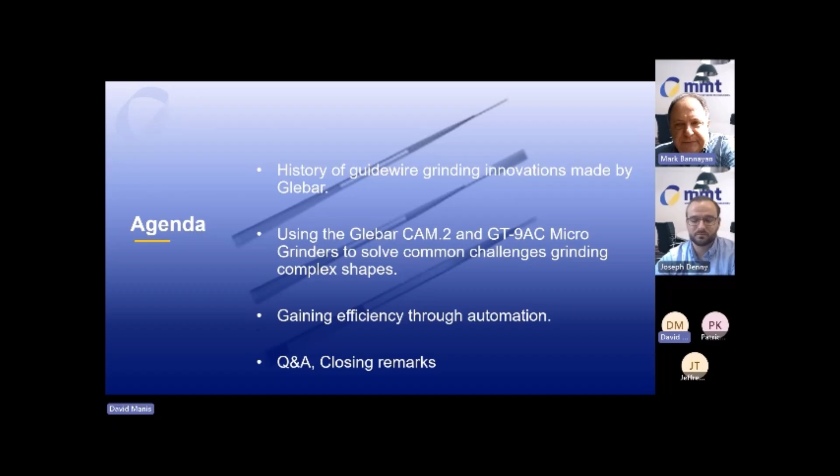Our involvement in the guidewire industry started back in the 60s. Traditionally, guidewires were made using a chemical etching process, which is pretty toxic, very time consuming, and also doesn't have the accuracy that's needed. Over the decades, requirements from the guidewire industry pushed for better accuracy, better throughput, and easier setup. So in 1966, we started grinding single taper guidewires.

As guidewires got more advanced, requiring multiple tapers, the technology at the time was not available to do multiple taper guidewires. So we developed a patented system using sensors, back in '94, which gave us the ability to grind multiple tapers in one process. That was a revolutionary idea.

Since then, we also developed a different way of handling guidewires. Traditionally they were done in centerless, which is a fast process, but your length tolerances are much wider. So the requirement for tighter length tolerances made us rethink the way guidewire processing should go forward.

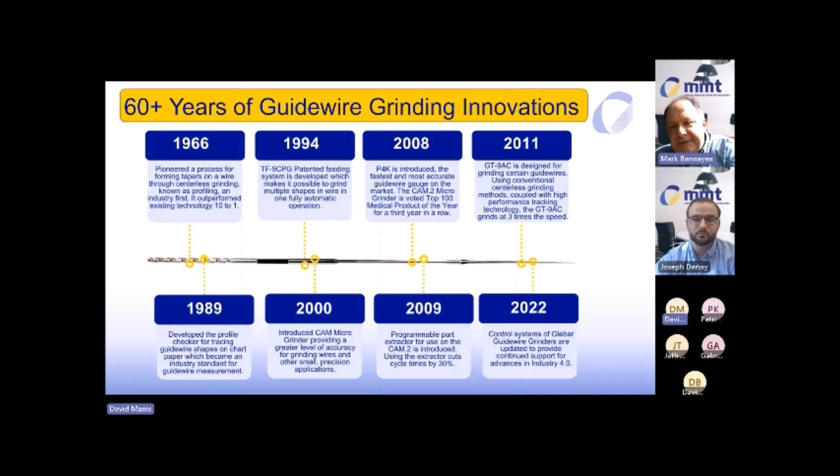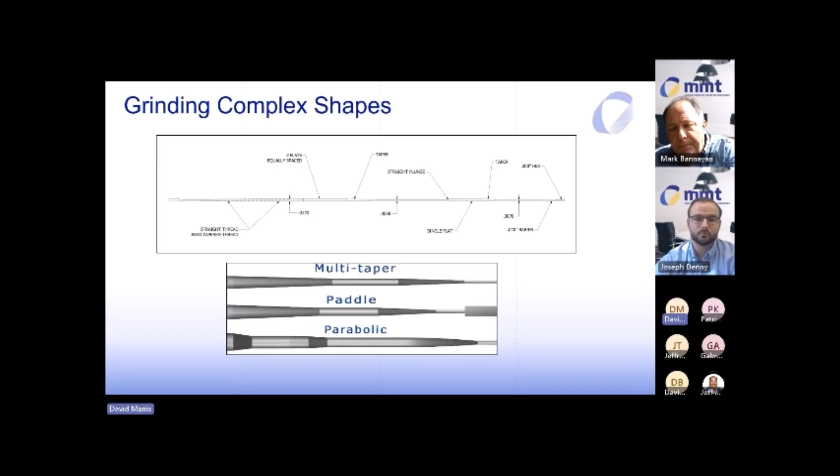The challenges that our customers face on a daily basis are on the material side. There are different materials coming into play with guidewires, whether you're dealing with SLT, different grades, nitinol, super elastic nitinol, different types of alloys. They all react differently through the grinding process.

So what Glebar does, we have hundreds of grades of wheels that we test with these different materials so we can achieve certain surface finishes. Also, tighter tolerances are becoming more and more required, and that's what we've built into the equipment to be able to meet those challenges.

The other thing we see is a skills gap in the field. Going back 15, 10 years ago, there was a lot of skill in the industry where people could basically set up a machine and make it grind wire down to 0.002 of an inch. That skill set is retiring, moving on. And we've recognized that challenge.

So we've replaced that with the control side. The controls aspect of our machines address the lack of skill in the marketplace. So we built the system so you could train somebody and get the machines up and running within a week, and one person could run 5-6 machines in tandem. Cycle times, of course, everybody's under pressure for faster cycle times, and that's what we work on here in R&D on a daily basis.

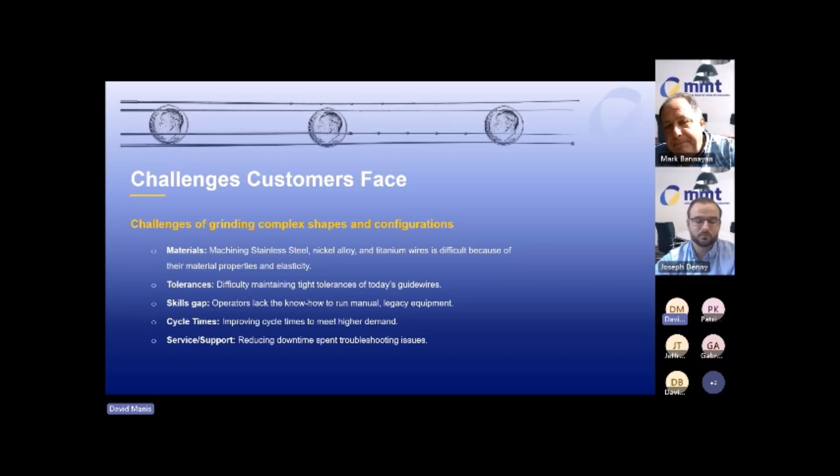So take it to Joe here, who's going to go over a couple of case studies that we've done on all the systems that we have.

So Mark mentioned a lot of challenges that obviously you're here, so you understand most of them. And I'm going to walk through them and help us understand how we're solving them.

So for everyone here, we're familiar with the stainless, the SLT, the nickel titanium alloys. They're kind of a pain. They're difficult materials to work with, and when we're presented them, we're starting out with material that's at around 30 thousandths of an inch and only getting smaller. So controlling the stock and actually maintaining position of that stock is a challenge.

We've approached that challenge in two different ways. On the CAM.2 system, we have our patented dual collet system, which allows us to grab and fully orient and align the parts throughout the grind. That, coupled with our additional captivation and tooling, allows us to have total control of length and orientation, allowing us to stop the wire, spin the wire, pull it back, push it forward, make the wire do whatever we needed to do during the grinding process. That, coupled with whatever wheel selection for the appropriate tooling, additional coolant delivery options, allow us to have full and finite control over that wire.

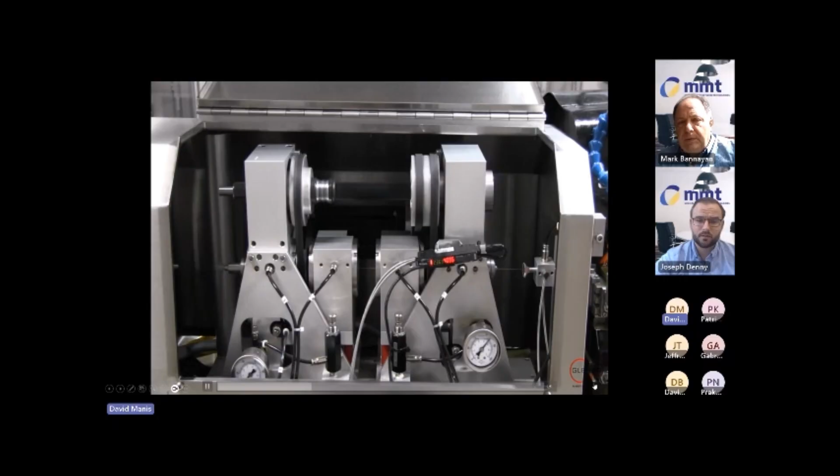So this is the dual collet system in motion. You can see everything is positioned in the grinding cell to prevent buckling and keep the wire fully in line.

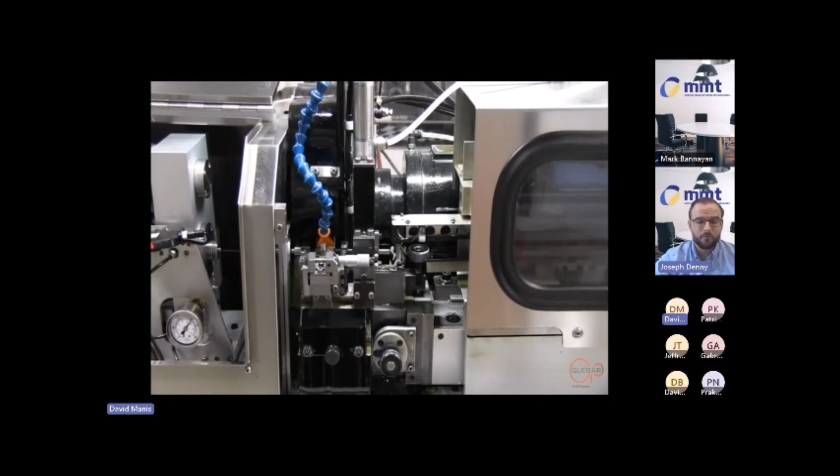David, can you take us to the AC? Once again, fully captivating the wire in the grinding system of the GT9AC, pulling it through with centerless grinding. We'll focus on the camera aspect a little later. David, if you could pull us forward.

So the envelope is always being pushed with tolerances. Both machines are built on a granite bed for stability. It's the same granite that you're going to use for all of your inspection equipment, so that helps us with both stability and vibration dampening in the system. All of our controls are centered around servo systems with 0.1 micron linear scales.

So on the CAM system, when we actually go in and do the grind, the front of the wire is located with a fiber optic sensor, and then the dual collet system grabs the wire and never lets go. It is a hand-over-hand feeding, so at no point during the cycle is the wire ever unmanaged. I know there are some other systems where you will have a hitching sequence where you could go for 12 or 18 inches and then you're going to have to hitch, and that first 18 inches will be good and the second 18 inches will be good, but you don't really know about one to the other. But with the true continuous holding of the dual collet system, there is no point of disruption. The 30 inches down the line will be just as accurate as the first 5.

And then on the GT9AC, we use the same fiber sensors to find the front of the wire, and then the camera system finds the tail end of the wire. And now we know the length of the wire.

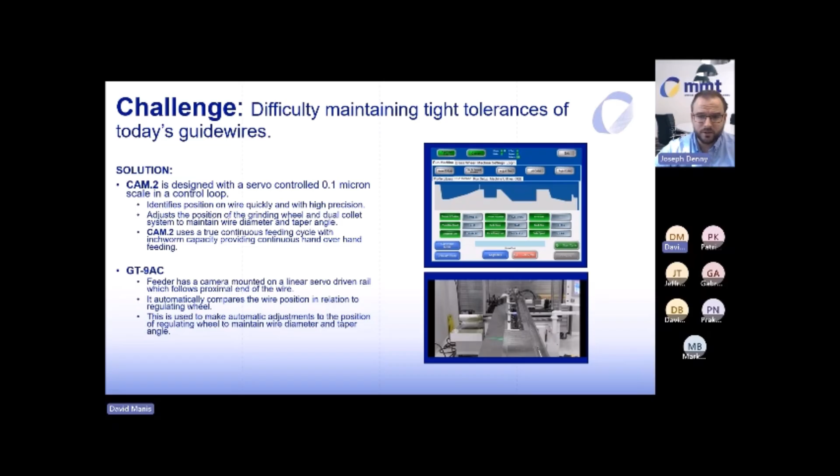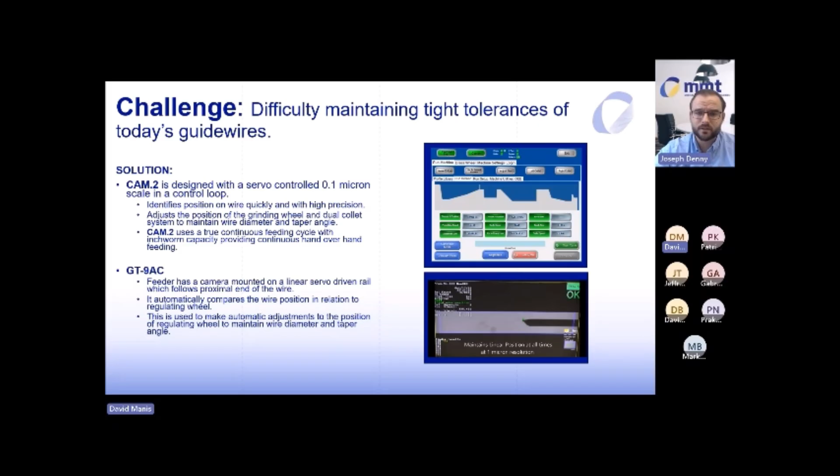This is the GT9AC feeder, and you should be able to see a little blue light - that's the camera system tracking the wire. The entire time you're grinding, the machine knows exactly where your wire is. On the CAM system, and this graphic applies to the 9AC as well, since the machine knows perfectly where it is, it displays that on the screen for the operator so they don't have to guess. They can just watch the machine run, and it's full real-time feedback for the operator.

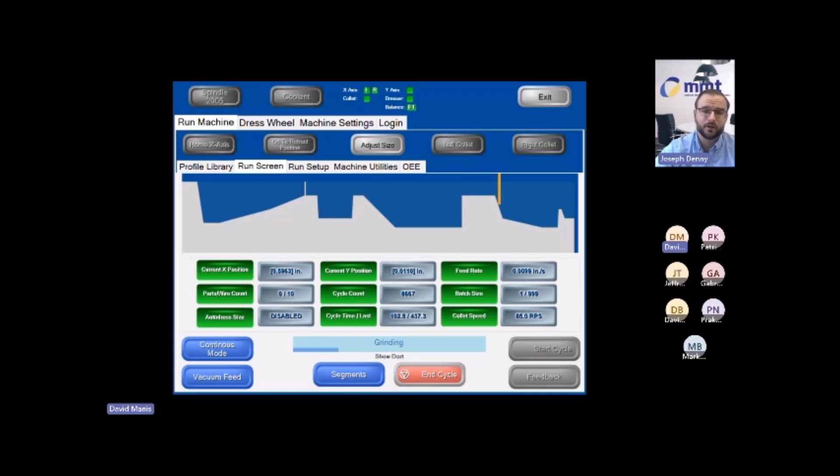Which leads us nicely into our skills gap with the operators. We all know the entire workforce is facing a skills gap, and we're always in a unique field of medical manufacturing. So what we've done is focused on taking the intelligence and putting it into the machine. Everything is touchscreen and conversational. The machine is running G-code, but the operator doesn't know that and doesn't need to know how to write G-code. All of the actual programming aspects are digested into a conversational language they can read straight off of the guidewire print and put into the system.

All of the features for the different accessories, whether you're running in our OD or centerless mode, whether you're using an extractor, spool feeder, or wire cutter, they are all saved in the process on the machine. With our infinite part library, you can pull up a part that you ran three years ago and it's still there with all the features, everything saved.

With our system, we've found that we can traditionally train an operator to run our machine within 3 to 5 days. With that training, and all of the intelligence built into the machine, they can then reasonably be expected to run multiple machines. With all of the accessories incorporating multiple operations, the cycle times are made possible so they can be monitoring all of them without much effort.

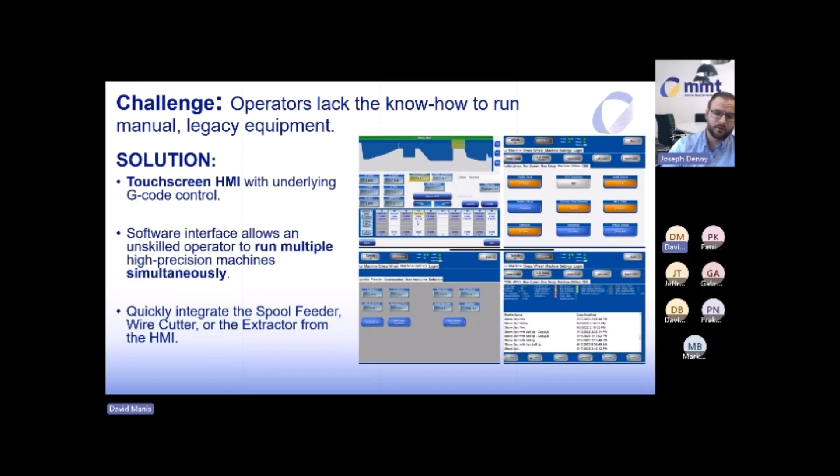Which brings us to improving all of our cycle times to meet our higher demands. The envelope is always being pushed once again for cycle time and throughput, and both machines are designed to accomplish what would have been several slower processes.

From taking the material off of a spool and cutting it to length, that's integrated into the machine. The grind that would have previously been several different operations is all included in one operation, one program. Any post-processing, such as sandblasting that's necessary, can be done on the machine. Then removal, final cutting, and extraction from the machine can all be done on the machine, removing steps of human interaction and opportunities to damage the wire mid-process.

All of the machines have P4K feedback. The P4K is the profile measurement system that measures the entire length of the wire, grabs length and diameter positions, and gives operators clear go and no-go results. Then all of that data can be pushed back to the machine to adjust and correct anything.

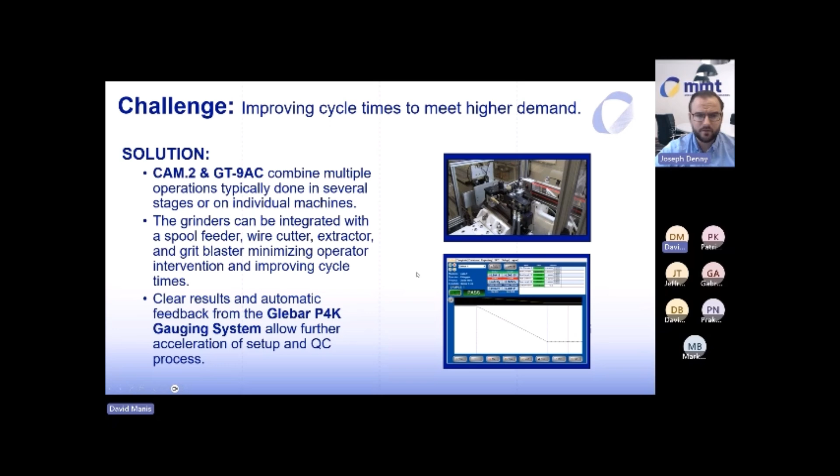David, I believe you have a little video. So this is an extractor on the GT9AC. These wires started out as a 13-foot wire. We are grinding one end of the wire, pushing it through, grinding the other end of the wire, and cutting it off, getting multiple parts per wire in what would traditionally have been two setups of already-cut-to-length grind.

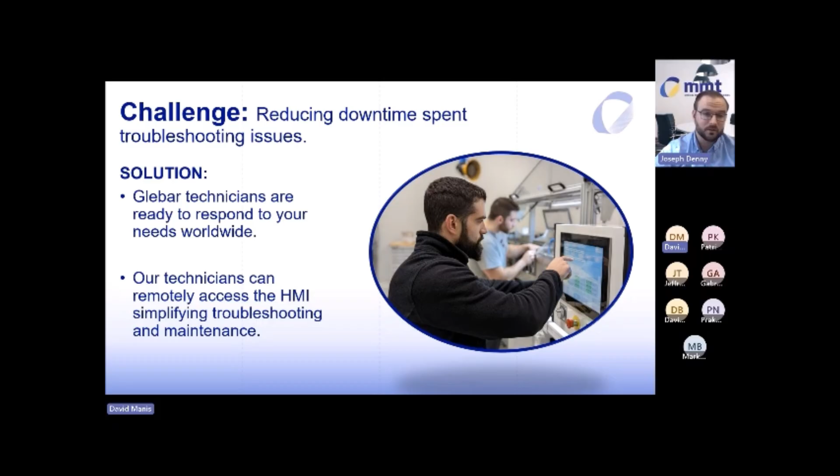So looping back around, the CAM2 is a full-featured guidewire production line condensed into a small package. The dual collet system provides for unrivaled precision as we move the part through the grinding process, and then using the P4K for gauging and any of the other accessories, it provides unrivaled versatility and whole-process capability.

David, are you able to start that video?

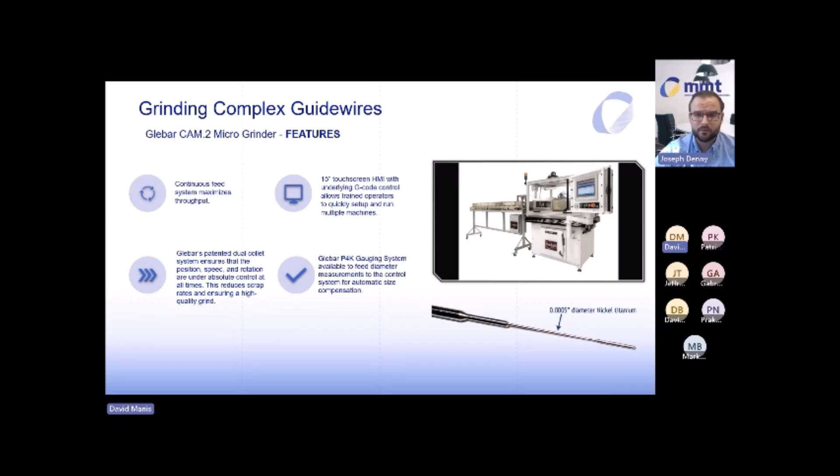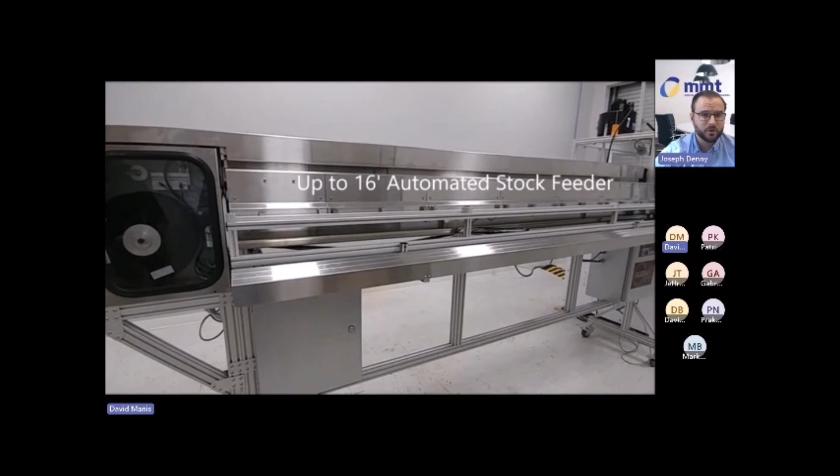Walking through a few of the features that we pride ourselves with. This machine is equipped with the spool feeder, so it will unspool and cut to length as it grinds.

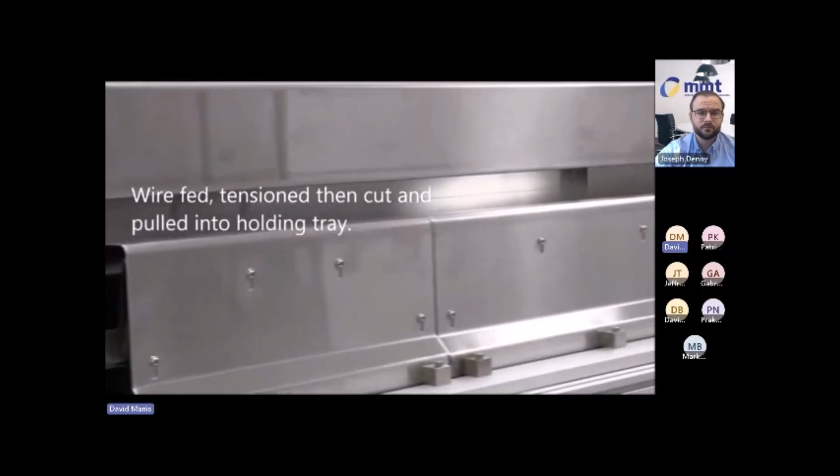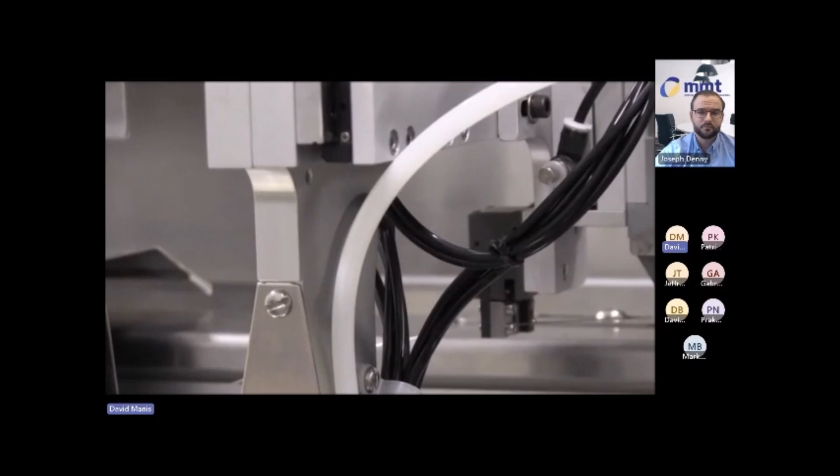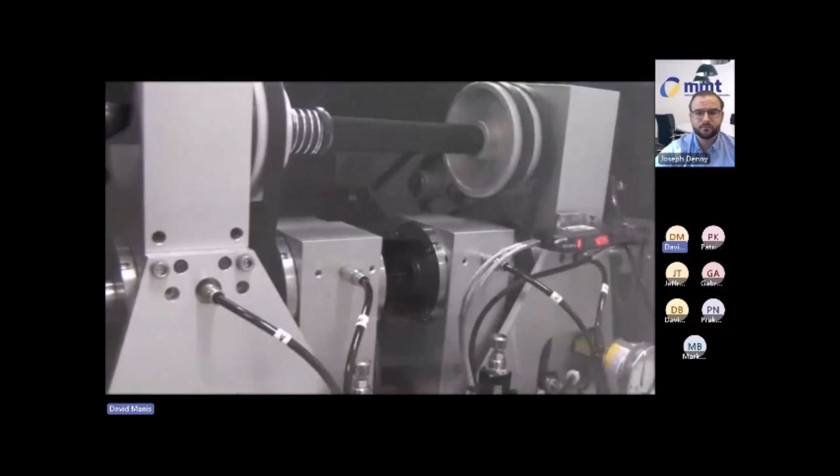And the wire is fully captivated and pushed into the machine, where the dual collet system takes hold of it. And then it can be ground to shape.

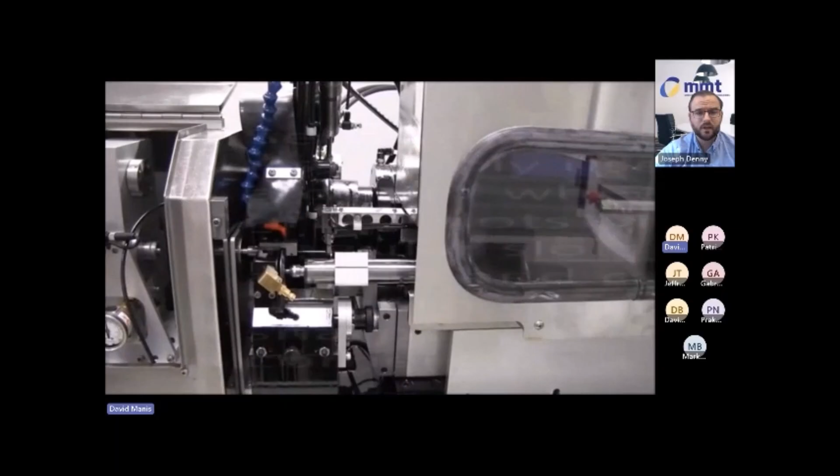And then in this process, we're doing cutoff and extraction of short wires. So for this specific application, we're taking 16-foot wire, or we're taking a spool, creating 16-foot wires, and then cutting that down into 2 or 3 inch long parts, producing 1 part every couple of seconds.

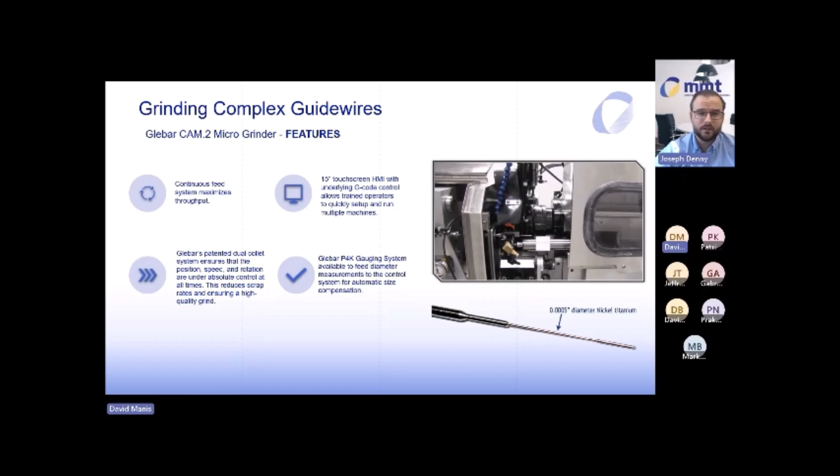And then moving on to the GT-9AC. So the GT-9AC brings back the unrivaled speed of a centerless grinder and couples it with high-speed precision and controls, allowing for high throughput and tight tolerances.

And I know it is a centerless grinder, which to some can be scary, but we've integrated features such as automatic blade sizing and touch off, and among other features to help make some of the more mystifying processes easier for operators and repeatable for today's operators.

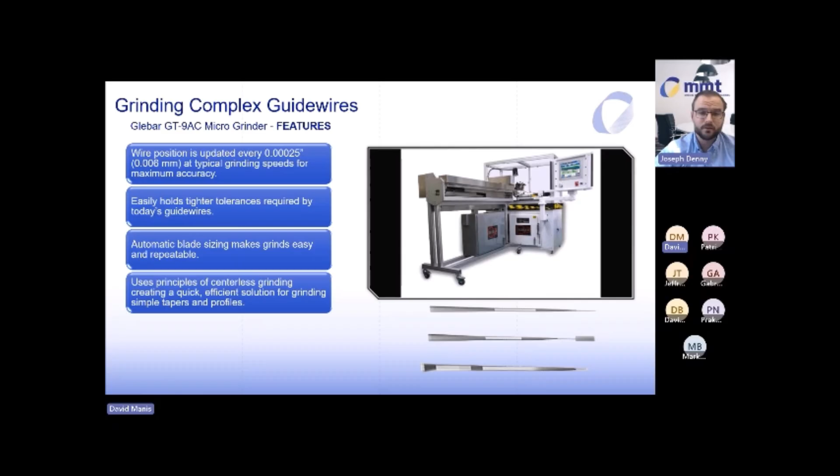David, I believe you have a video as well.

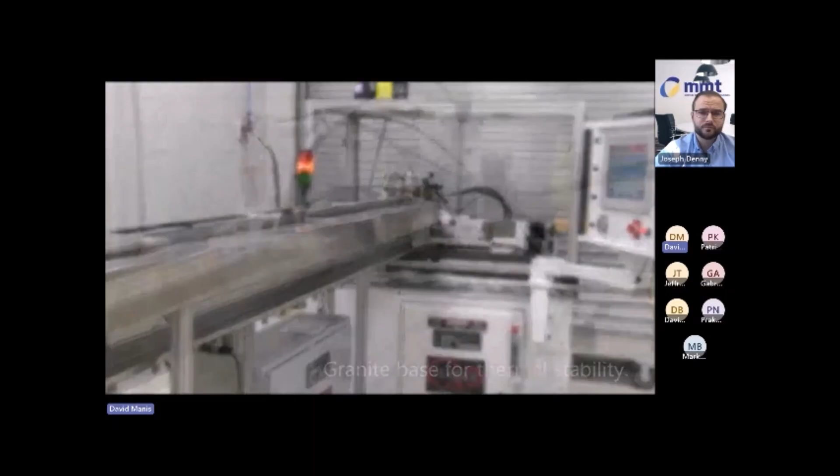So these are just a few of your standard parts that are going to be run on the GT9AC. So the wire will be fed in. This machine is also capable of having a spool cutter or an off-the-spool system.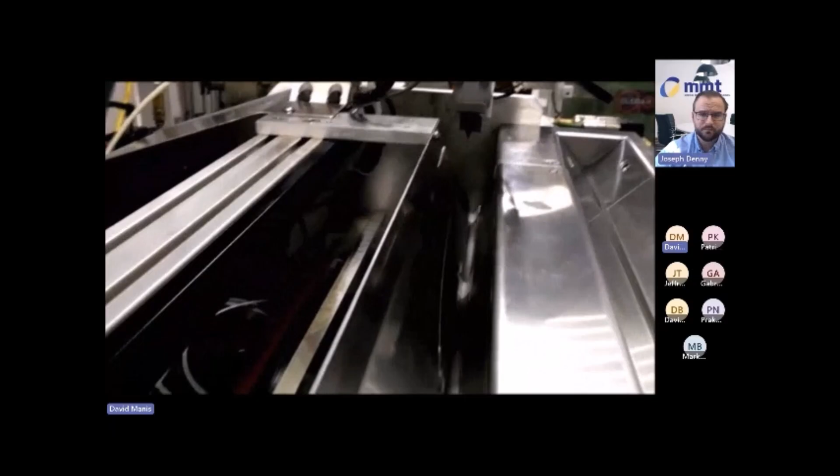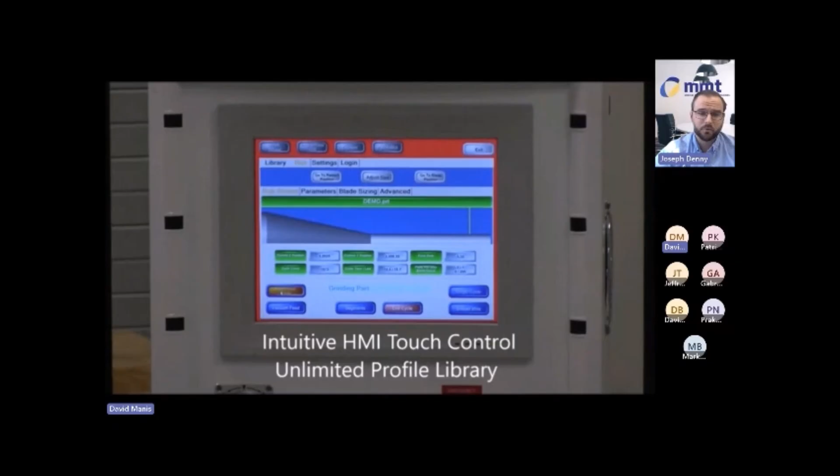And then the camera, which is that blue light, will find the end of the wire, measure the wire, and then track it through the grind, moving the regulating wheel away as necessary to create the desired shape.

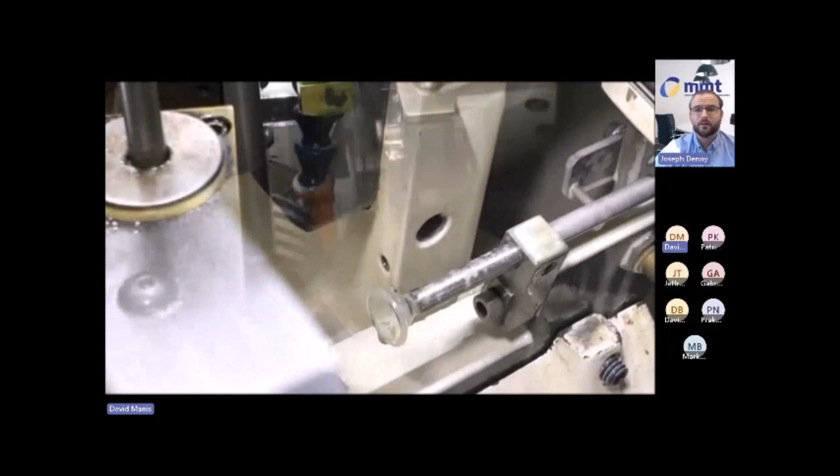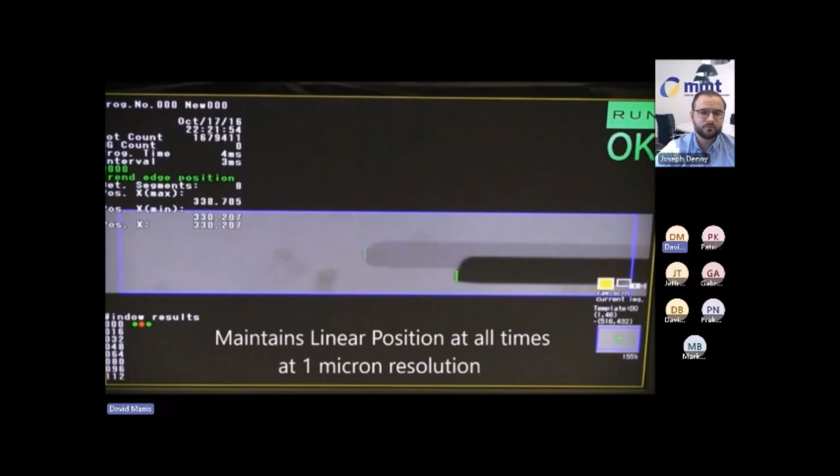So, and then there's the P4K, which has become the industry standard for guide wire measurement. It scans the entire length of the wire, capturing its profile and calculating all of the gauge points for a quick and easy go, no go response.

And then all of that data can then be fed back to the CAM.2 and the GT-9AC in order to make size compensations on various features or the whole wire. And everything is set up for the network.

So all of the scans and data is saved, recorded, and made available for CPK and any other statistical analyses that you want to make.

And because everything can be on the network, it can all be in one central database, where if you're running a lot among multiple machines and scanning it on multiple P4Ks, that can all be saved into one central database, eliminating any bottlenecks that might arise from high production volumes.

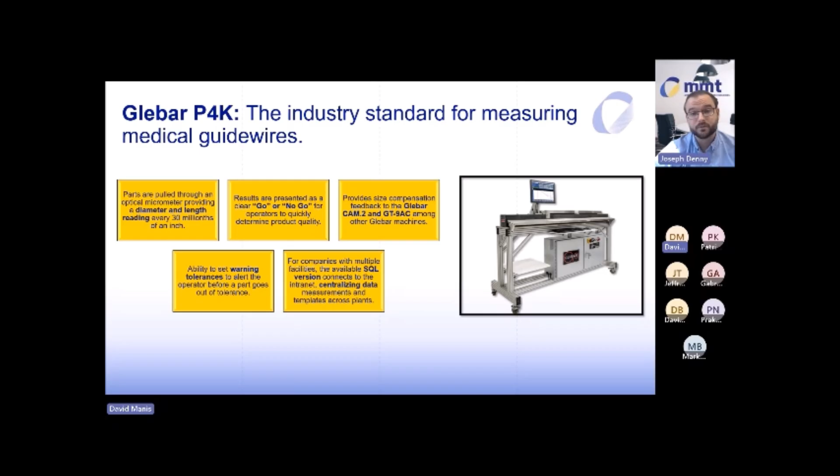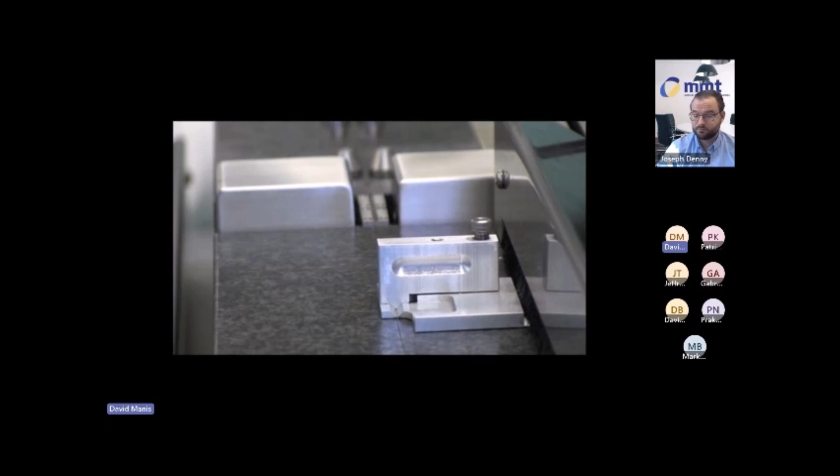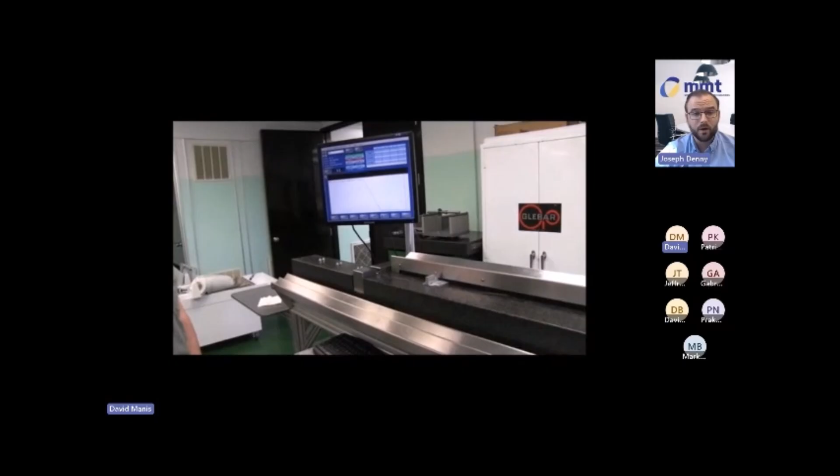You can see him scanning the wire. It's previewing the wire for you. Then it will run all of its calculations and tell you how well you made the wire and suggest any corrections.

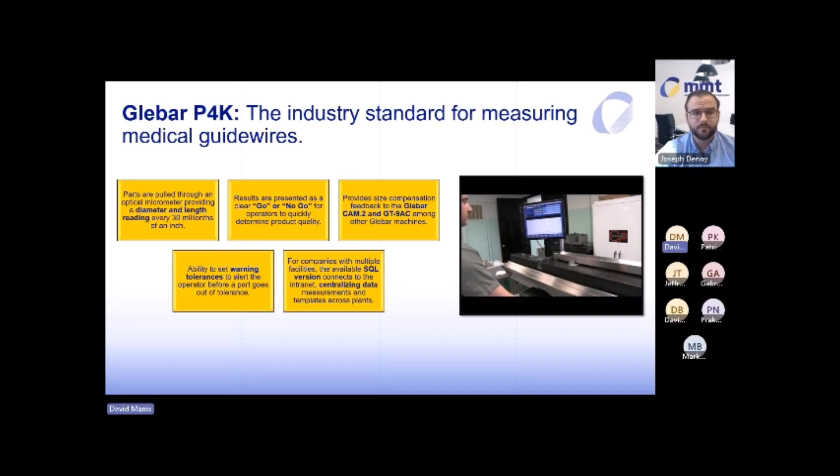Now, not every wire needs the full features. Not every wire is going to be 13 feet long and have 15 different features. Sometimes all you need to do is deburr the wire, take that hard edge off, and that's where the GSR-6 comes in.

So it is a tabletop system that takes it, you present it a bundle of wires, it removes the wire from the bundle, it presents it into a dry grinding situation, so you don't have to worry about having an entire coolant system dedicated to this machine or cleaning the wire after.

So after the deburring process, it is then presented to a camera, which inspects to make sure that the desired shape was achieved, and then automatically bins it into a good, bad, pass or fail.

It's a quick and easy system, which helps eliminate operator strain, as it is a very repetitive process, and a fleet of these will outperform a fleet of operators.

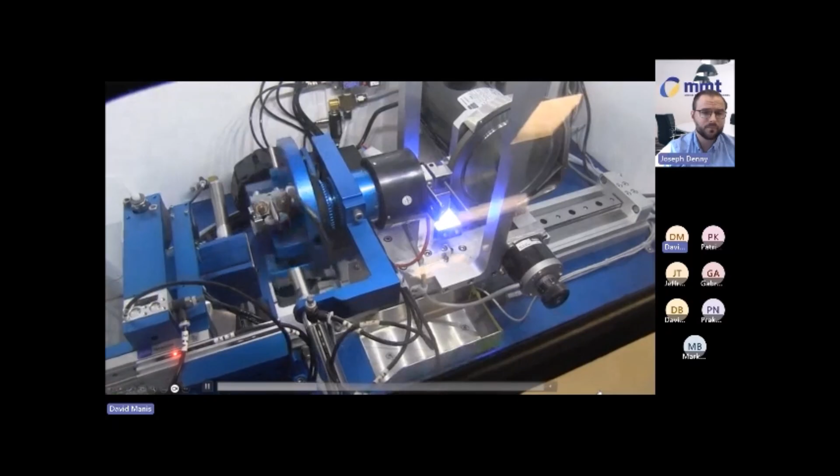So that's a very quick and efficient process for deburring wires.

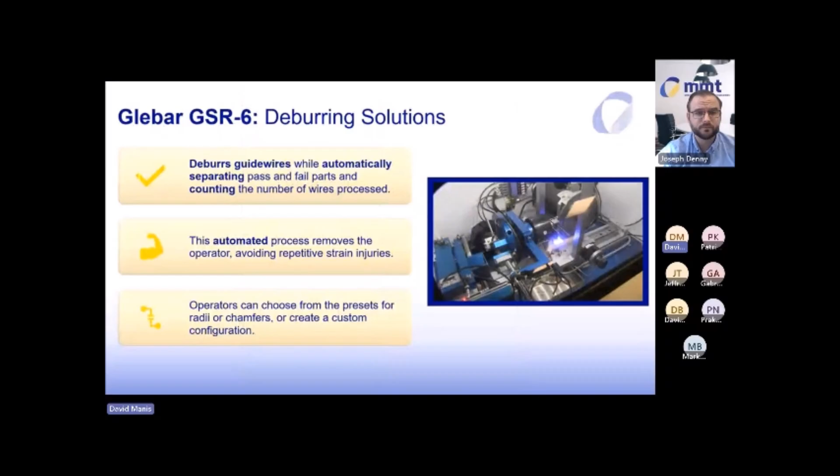So across the entire fleet of our machines, you can see how we've been addressing the industrial need for automation, handling all these different materials and form factors that guide wires have taken on over the years, and leading it into a method that has less material handling by an operator.

So a fully kitted out machine will take the wire, cut it to length, move it into the grinder, do any post-processing and extract it. And all of this allows your shop floor to move efficiently, have one operator running multiple machines and producing high quality product.

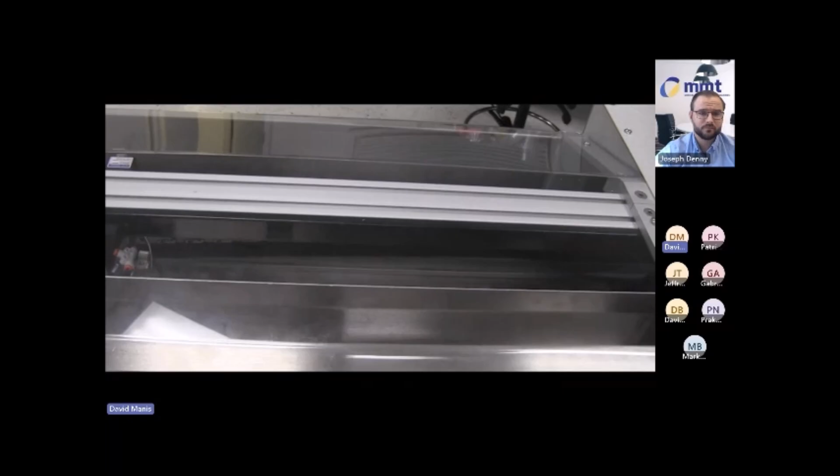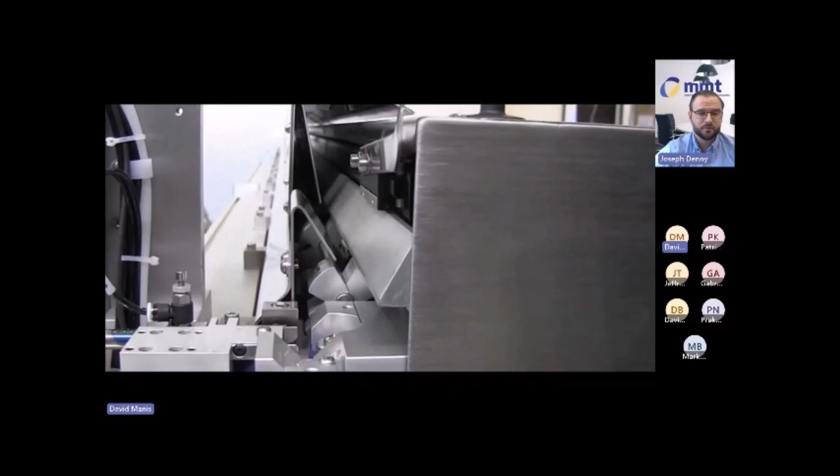Just a few more glamour shots of the automation.

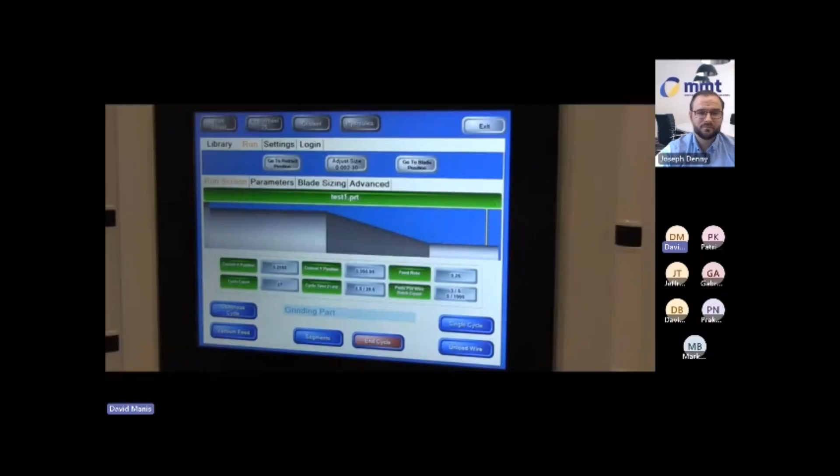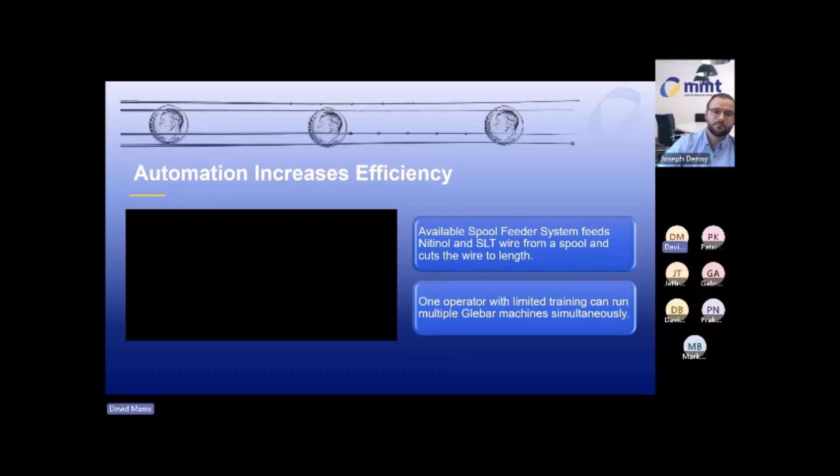All of these different options can be combined together in many ways in order to achieve the optimal process. I'm going to hand it back over to Mark.